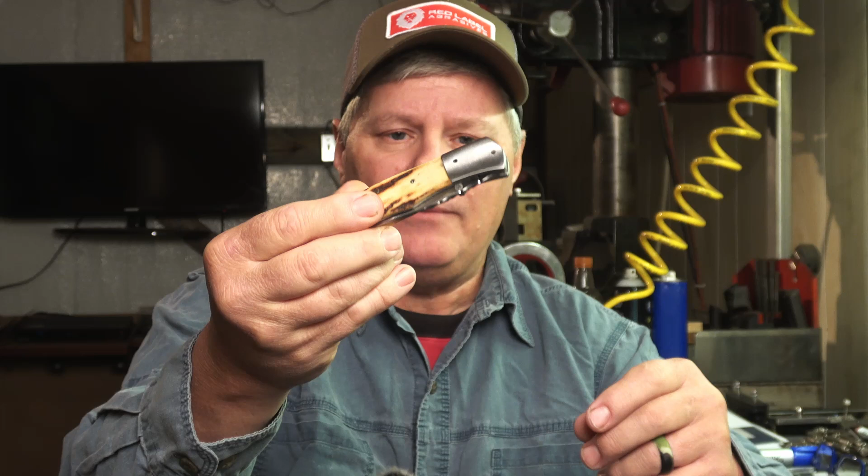So I will be using a mill to make the knives and a few more modern tools, but I made several liner locks and frame locks in the past without a mill. Matter of fact, this is about a second or third liner lock that I made, and that was made totally with a drill press and a slitting saw on a drill press.

Something I want to mention here is the liners in here are 316L stainless. That is about 60 thousandths thick. I have used this knife a lot. I carried it for many years, doing all sorts of things, skinned a lot of game with it, and no issues with the liners.

So titanium is the liners that most people use today. Back then it was kind of infant, used in knives, but it's widely used today. I really like it because it's lightweight and tough and holds up really well. And there's a few other reasons that I'll go over as we get along, but that is a stainless liner in that liner lock. Now this frame lock was about the third frame lock I made.

It was also made entirely on a drill press. It's nothing pretty to look at, but I carry it, and as a matter of fact, it dispatched a couple wild game animals this morning. Actually, I'm the one that took care of that this morning while you watched.

I know, I should have mentioned that, Bubba. I'm sorry. I really appreciate you. You're a great scout, you do excellent work dispatching game. I just couldn't do it without you, man. Do you mean that? Yep. Well, it'd be really great if you could go out and do some more scouting, and maybe we could do something about that this evening. Okay, I can take care of it. I'll be back in a bit.

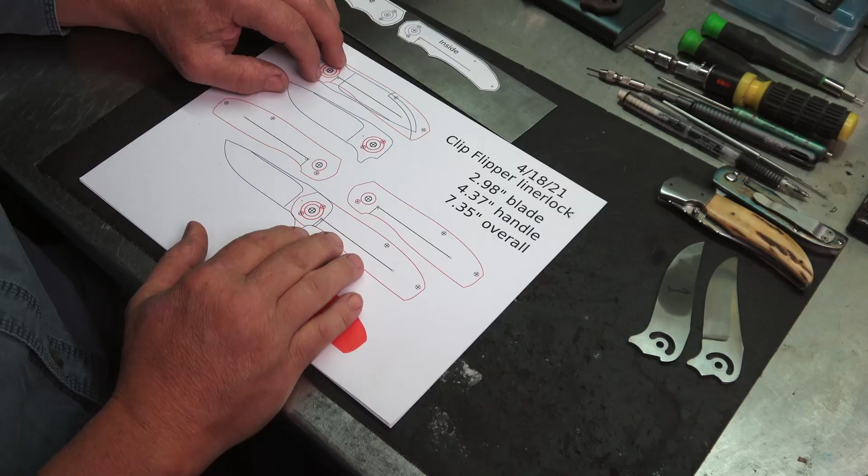So let's come down here and look at our patterns. I use software to do this. I use a program called Inkscape. It's free, and you can design just about anything you want in there. You can even export and have them cut out if you want to.

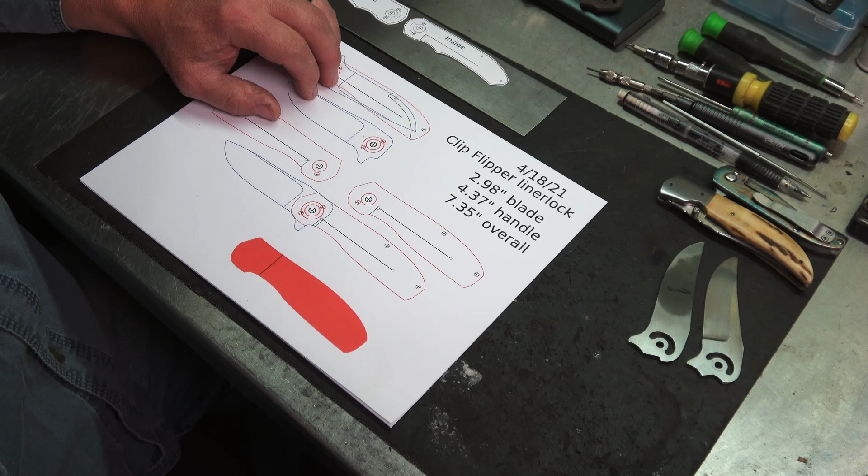The way I learned to do this was by designing a pattern on paper and cutting it out and using a pen to go through my liner or my frame and through the pivot area and work it back and forth until everything worked. And that's how many makers did it for years, and some still do to this day. There's nothing wrong with that.

I really like using software because I can set it up. I can actually rotate the blade in the software. This one's not correct, as you can see, the blade's down in the backspacer.

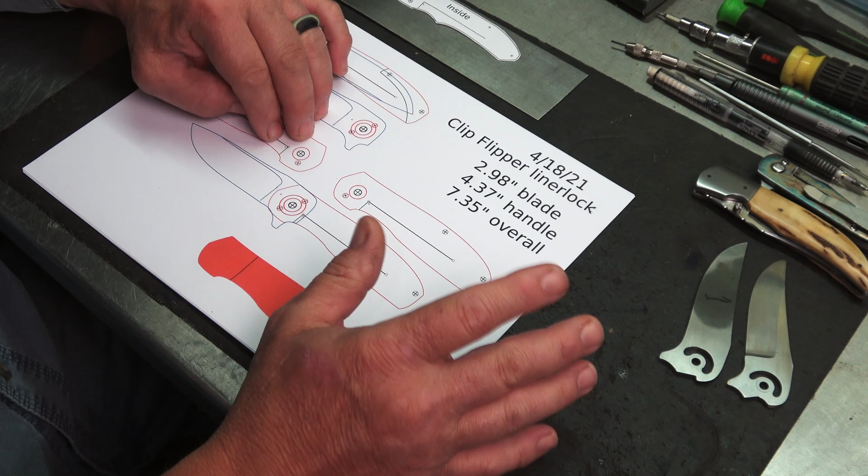But I can assure you I got everything correct here. You can design everything, do all your hole layout, and even mark the centers with the software. I've got a drill pattern and everything. Then I cut this out, and I can glue it onto my liner material, or if it's a blade, I can glue it onto blade material and then cut them out.

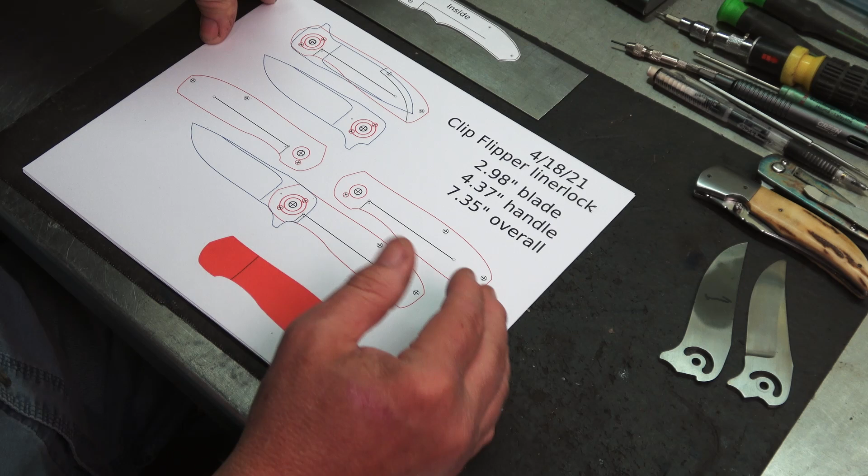So every knife is not going to be exactly the same. You're doing this by hand, not having them laser cut or water jet. However, you could - mine are not. I'm doing everything by hand.

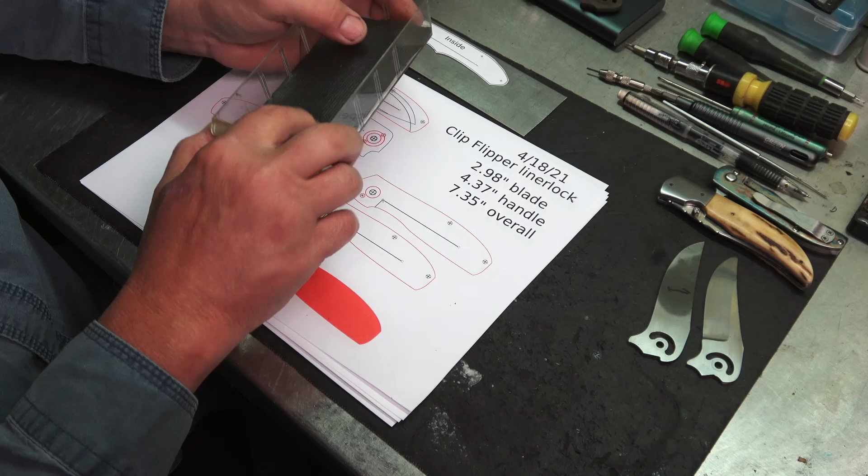One of the things I do is I have trays that are separated, and I put each individual knife and all of its parts and components in its own tray. That way I keep everything from getting mismatched, because you're going to have a few thousandths differences in each knife, and you want to keep everything the same so you keep your accuracy and your blade functioning. You'll have mess ups doing this.

For example, when I was making this particular frame lock, I messed up the liner. It's hard to make a set of liners for a blade when you've already ground your lockup area. You can do it, but it's not easy. That's a blade that I won't probably use.

Now here's one in a different case. Everything worked perfectly until I got up and ground my lockup, and when I did, I overground it. No good. So I'm back to the same place with that blade as I was this one.

It's a lot of mess ups, easy to mess up doing this all by hand, and you just have to be very careful and take your time. It's why it takes a lot of time to build these knives.

I've got several knives here that are ready to finish, and these have to be finished profile, do all the drilling, and then heat treating. So after I heat treat, I'll do all my cleanup work. If it's a clip, I come in here and cut the clips and grind the bevels.

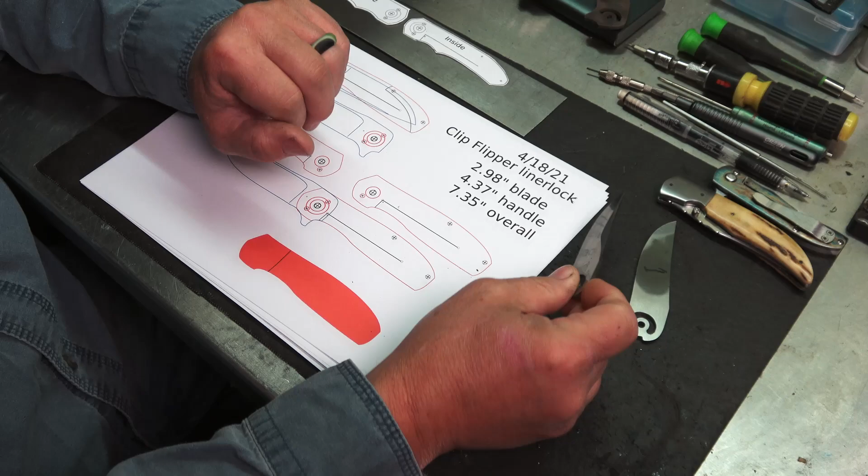When it comes to tools, that's where you can really go deep dive. I mean all of the mills, the counter bores, and all of that stuff, depending on your hardware you use. If you change up a screw head from a button head to a socket head, that sort of thing, you're going to have to use a different counter bore.

Now, I didn't always use counter bores. I used drills and end mills, and that made it kind of difficult because you got to really line up everything perfectly, centered, lock down the equipment you're using, and it just really makes it tough.

Now I'm using a DRO on my mill, but I also have a primitive DRO on my drill press, one of my drill presses that I used to make my earlier frame locks and folders. It was just digital calipers that I modified with brackets and made it fit my drill press. You'll see a lot of people doing that today.

Another thing is I have a written procedure that I use and keep and refer to, because I can't always remember exactly everything. I'm getting old.

I also make this available to my patrons. This is a living document because I'm constantly updating it, and I can't remember when the last time I updated it, but this is specifically for frame locks.

And more about tools, I use a surface grinder now to get my dimensions right on my parts. I didn't always have a surface grinder. The one I have right now is only a couple years old.

Before that, I was using a magnet in my hands to hold parts and really try to dial them in. It makes it extremely difficult, but you can do it. It just takes longer, less efficient, probably less accurate. I have noticed a tremendous improvement on accuracy when using a dedicated surface grinder to do this.

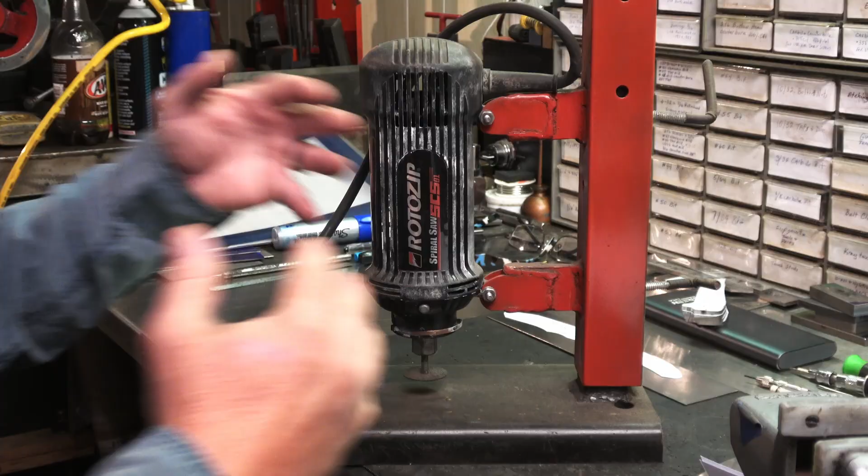High tech, my friends. Now this is an old router, trim router, that I just made a frame for where I could mount an arbor in here with a cutoff wheel and put my frames up here and cut them by sliding.

Now this assembly here, I'll just loosen these two and I can slide it up and down to adjust it exactly where I want to. It's high speed, it works great, but it's primitive, but it will work.

For a few dollars, you can be set up cutting your locks like this. You can do them on a drill press, but you have to remember a drill press is not designed for side pressure. You can loosen up your Jacobs chuck and it'll fall right out on you. It could hurt you, but you can do it.

I did it. I'm just not going to recommend it for that reason. Okay, now I'm going to show you another tool. This is homemade, handmade to cut lock bars, and I'll show you a tapping tool. Introducing the Redneck Tapper 1000. Yes, this is just something I fabricated.

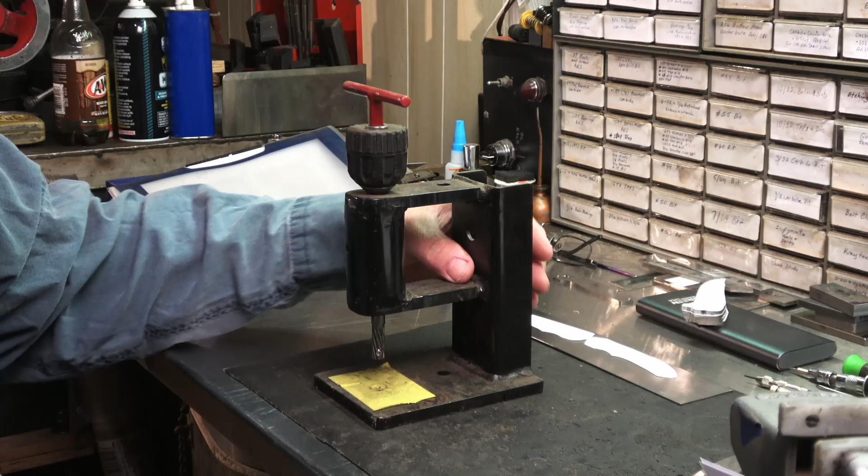So I have a chuck up here with a broke counter bore that I can use to set a tap into and tighten up with a set screw right here. And I can just tap. Now, there's Tap-matics out there where you put them in your drill press, you tap, it'll automatically tap, stop, and then you raise back up and it spins out. I don't have one of those. I will get one of these days. I'm just poor. But this works great, and I still use it.

Now, I use thread forming taps, and basically what that does is it uses pressure to push the threads in instead of cutting them in. I find it works much better, especially on those small taps, and we'll be covering some of those. I use down to a 0-80 tap, and it works great.

Thread forming taps. So in this particular frame lock, I'm going to be cutting a channel in here with a hidden pin. Now, you can do this on a drill press. There's some jigs you can make and do this. Again, side load, be careful on a drill press. But I'll be doing this in my mill.

Now, you can design your folders without that channel there with just a traditional stop pin up here. It'll be up here on you behind your blade at the top somewhere, and you just have to design your folder that can work that way. This one will not, because it's a flipper style, and that flipper would come up and hit it. Now, if I move the flipper, yeah, I could make some of that work, but I found this design to work great the way it is.

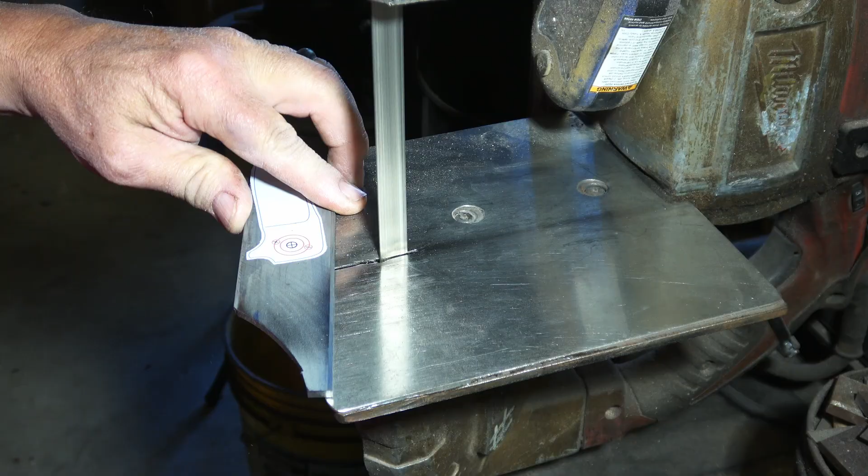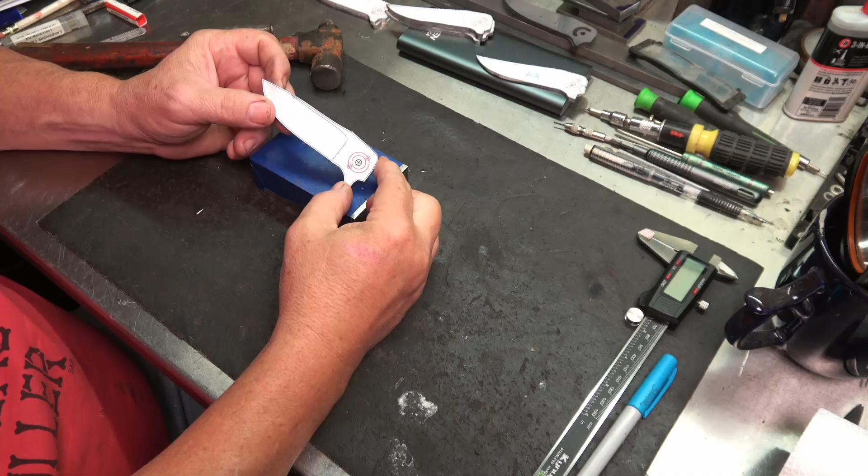So my blade is just roughly profiled. If you notice, I'm leaving a little bit all the way around. I'll come in here and clean this up real close after I get my holes done. I stay off of this back end lock side. I don't go past the line, even though I'm going to cut past it. I clean it up, and then when I go to do the lock face, I'll cut it in.

But I make sure I get my holes where they need to be before I do the final profile, in case I get off. Now I'm going to show you a couple ways to center punch, and it's very important that you center punch and drill your holes exactly where they need to be. A couple thousandths off will start affecting your lock and fit up.

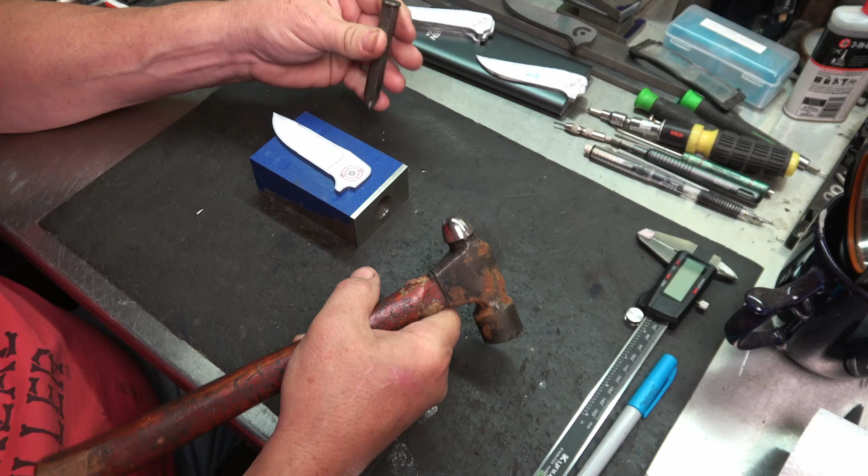But I'm going to show you a couple ways. The first way is just the old-fashioned standard way. Now, I use these optivisors to see what I'm doing, and I put a light on the subject from the other side. This way I can see and I can get a good mark. The other method I'll show you when we get on these scales, just to show you, you don't have to have fancy tools. You can still use center punch.

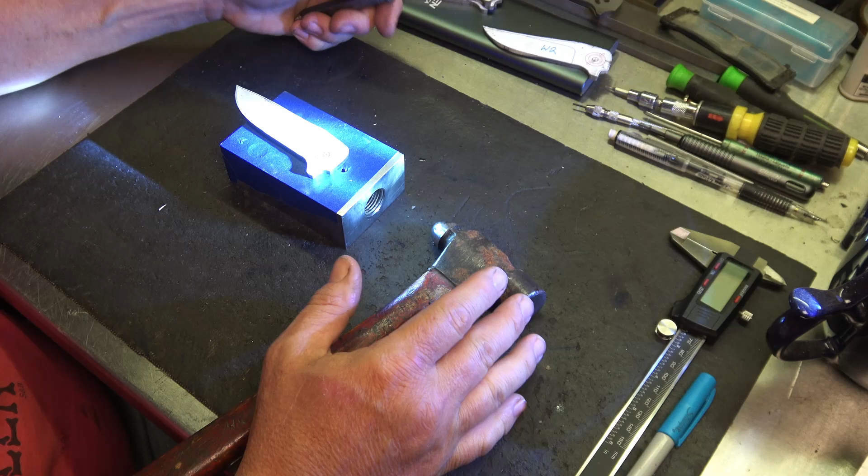I want to come in here and get this as close as I can to the center, or my target marks. And that one's punched. And you know, I can see that it's off probably a thousandth, but that's why I leave this on here. I can adjust if I need to.

Now, these are going to have tracks cut in the blade because I'm going to hide the stop pin in the blade. I learned this method of cutting tracks from Ecom Knives. I believe in giving credit where credit's due, and this is the method he uses, and that's where I picked it up from. I don't think he's making knives anymore, but he had a channel on YouTube a long time ago. It may still be there.

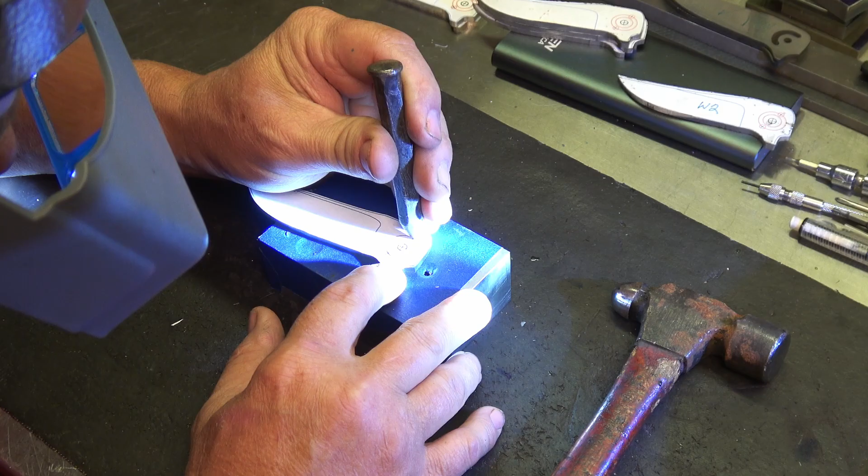What I'm going to do is come in here, instead of marking these dead on the X, I'm going to come back a little so I can adjust that when I'm doing my final lock up and fit up. So I'm going to punch that one, and I'm going to come forward on this one, on each one. You can see I'm forward and forward, and the track will be right here. When I go to do the final fit up, I'll leave my jig set up in my mill, and I'll adjust those by putting it in and out of the mill, making the cut.

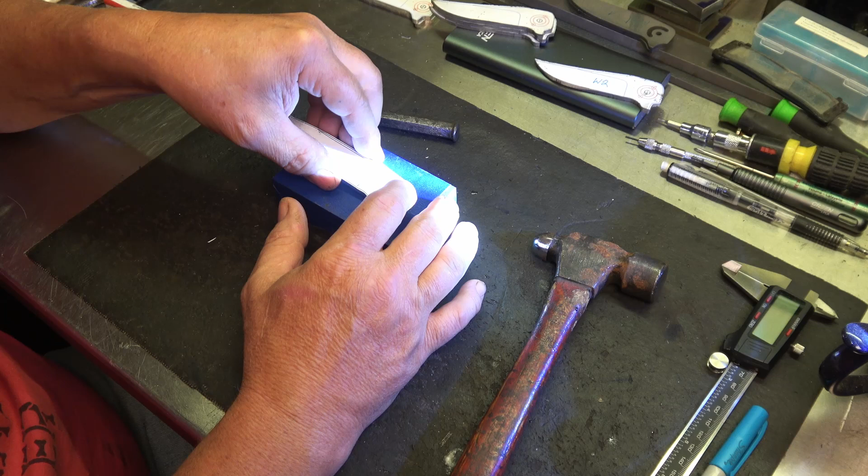First thing I'm going to do is drill the pivot, and I'm using a number 13 drill for the pivot hole, and I'll come back and ream it to exact size. Number 13 is like 0.184, 0.185, something like that, and then I'll ream it to 0.187. I'll be using a spot drill to start it though, a 1/8 spot drill.

Like I said, you can do all this on a drill press. I've done it, but cutting this track is a little tricky. You got to make yourself a little jig to do it, and you can still do it on a drill press, you just got to take your time. But it is risky because the drill press is not made for side loads. You'll loosen up your taper, and your Jacobs chuck will fall out. But anyway, let's get our holes marked and we'll start drilling our pivot.

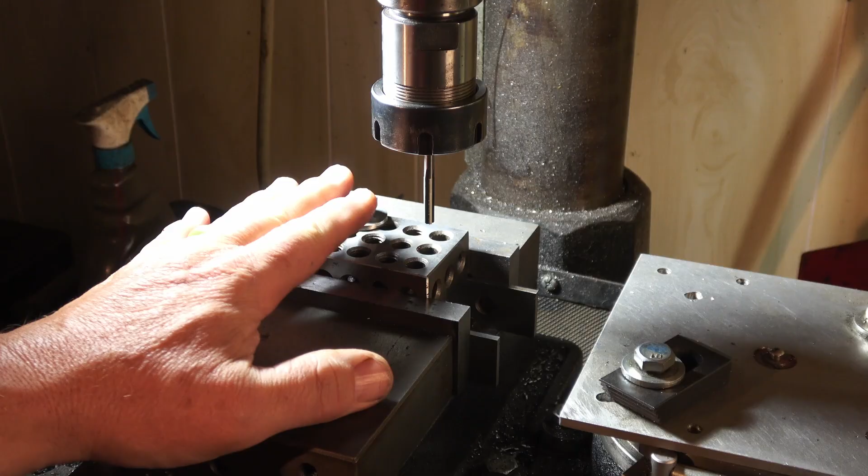Let me talk a second about a couple things that I kind of go over too quickly and need to tell you about. So I've got a 1-2-3, or 3-2-1, machinist block in here. They have threaded holes in every other one and one in the center. And I put them on parallel bars. This thing needs to be completely 90 degrees to your tool that you're cutting with, especially on that pivot. So if you cut your pivot at a slight angle, then it's going to throw your blade centering off.

It has to be square. It's very critical. That pivot hole is one of the most important parts of this process, getting it square and to size. So I keep it square. And if you notice, I just have a stop on here and I let the bits center themselves, and then I hold them down with my hand.

They can't go anywhere, they can't come up, and I let them cut. Now I use carbide tools exclusively. They last long, and I cut titanium as well, so I just use it on everything. You'll need to refer to cutting speeds and all that. I'm all over the place with it, but Lakeshore Carbide is the best carbide tools.

So right now I've got a 3/16 reamer in here. I'm gonna go ahead and ream these holes, and then I'll start working on the track. But most importantly, keep everything square. I do some peck drilling, clean the hole by just blowing it out, or however you do it, and continue drilling. Taking my time, keeping it flat, keep it square.

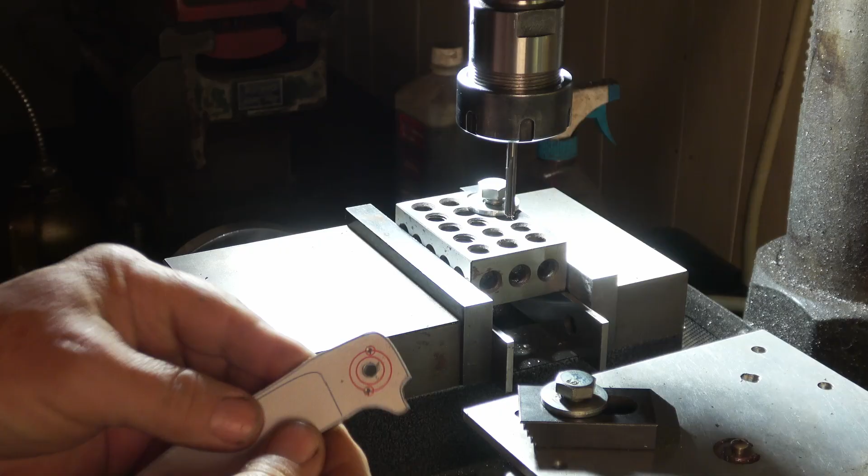So with all the pivots reamed, and before I go to the next step, which is cutting the holes for the stop pin track, I want to deburr the backside, because every time you go through your blade, frame material, or liner material, whatever you're doing, you need to deburr the backside, or that'll cause a problem. You'll get an out-of-squareness there because of that burr.

Now I use a lap plate. You can use a granite surface block or your disc sander. I use a disc sander, but it's such a small burr I can go to the lap plate with some 600 grit paper, and I lay it on here and just go back and forth, and you can hear it and feel it when it goes away. And there, it's gone. It's quick. I don't have to run over to my disc sander, but that knocks that burr off, and now I can lay it up there.

It'll be flat, I'll punch the holes. So I'll take a 1/8 bit, 0.125, and drill holes at the starts and stops of the track. If you remember, I punched them just shy of where they actually need to be. Then I'll put in a mill and cut it to size. The mill is slightly larger, and that gives a little bit of wiggle room in there for the pin, so it doesn't catch as the pin is moving. Once I punch those holes, I'll have to deburr again, set them back in the jig, and cut the tracks.

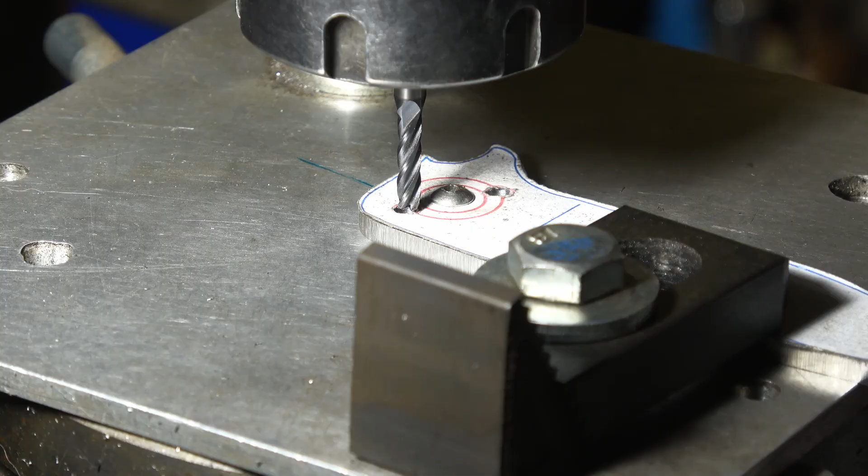With the start and stop point of the stop pin track drilled, now I've got a 9/64 end mill in here, and I'm going to cut the track. The 9/64 is a little larger, of course, than the 1/8, so that allows me a little room on each side of the pin where there's no touching as the blade moves up and down in the folder. So we'll go ahead and get this cut.

This takes a little while. Like I said, you can do this on a drill press with a jig. That's how I did it originally. It's kind of sketchy, but you can do it.

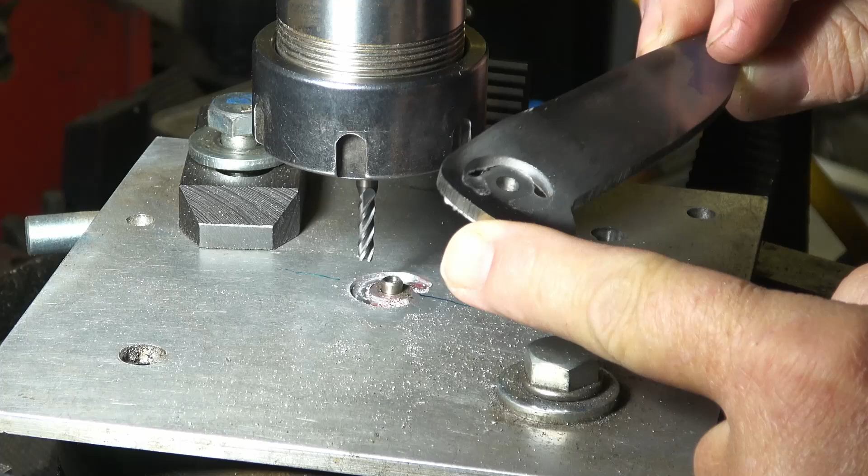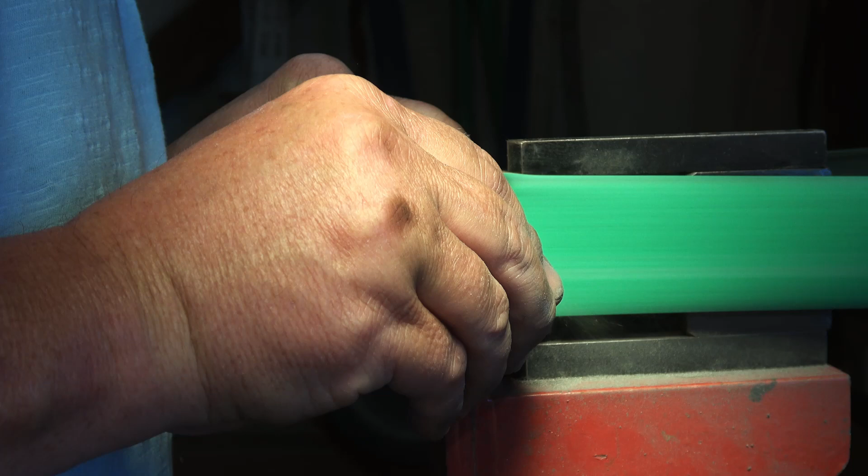All right, so after I got the tracks cut, I went ahead and cleaned up these profiles, got them up to 600, and I will hand sand this later and clean them up, make sure I don't have any burrs or hard spots. I will also clean up this track after I do the fit up. Right now they're going to be short a little, hopefully, and then I'll come in here and clean these up and do the heat treating, and I'll have to clean them up again.

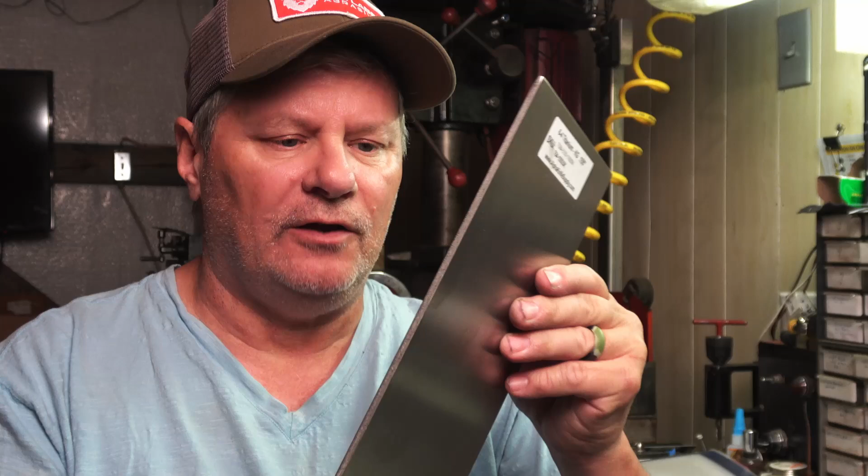Now it's time to make the frames. So I got a piece of 0.155 thousandths titanium. This is knife maker grade. It's very flat, it's very expensive. And I will go ahead and start cutting out the frames. I will put the templates on there and do the same thing and get them cut out.